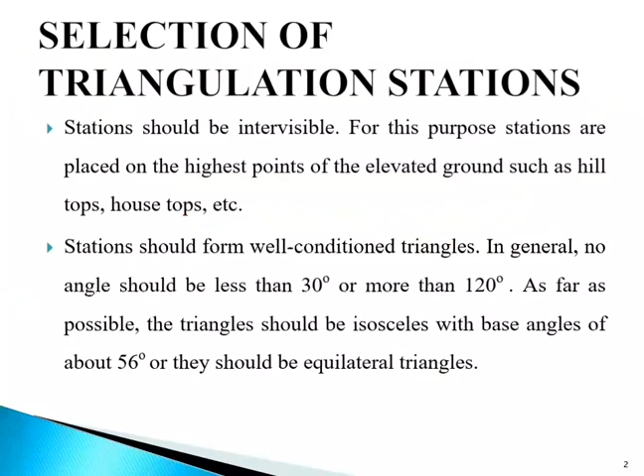Stations should form well-conditioned triangles. In general, no angle should be less than 30 degrees or more than 120 degrees. As far as possible, the triangles should be isosceles with base angles of about 56 degrees, or they should be equilateral triangles. Next, the station should be easily accessible.

Supplies of food and water should be available. There should be a suitable place for camping, or the nearest suitable accommodation should be available. Station should be so selected that the survey lines are not too long. Small sights lead to inaccurate centering, while long ones cause inaccurate bisection of the signal.

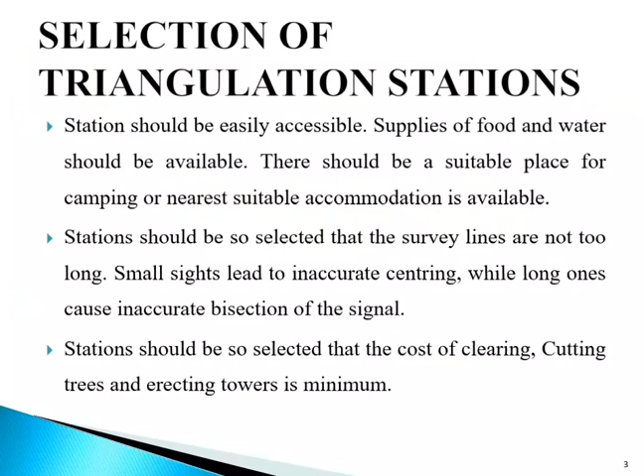Station should be so selected that the cost of clearing, cutting trees and erecting towers is minimum. The station should be in a commanding position so as to serve as control for subsidiary triangulation or detailed surveys inside the network. Station should be selected so that the line of sight does not pass over crowded localities such as cities, towns, factories, etc., to avoid irregular atmospheric refraction.

The line of sight should not graze the ground or other obstruction. It should pass at least 2 to 3 meters above the ground.

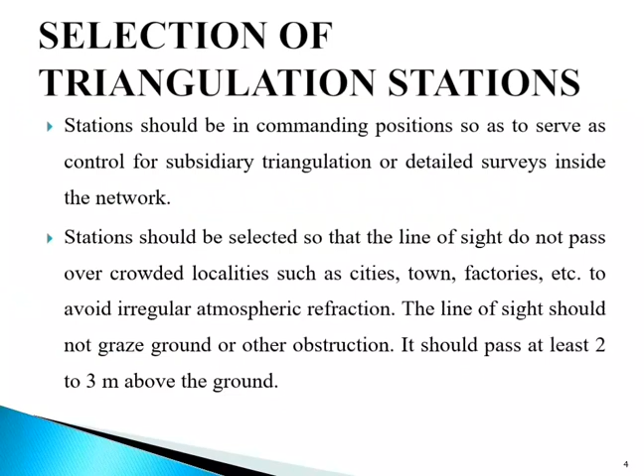Let's see the intervisibility of triangulation stations. The most essential condition of triangulation is that the stations should be intervisible. As stated earlier, the stations should be chosen on high ground so that they are intervisible. For small distances, intervisibility can be ascertained during reconnaissance by direct observation with the help of powerful binoculars, either at ground level or from the tops of trees.

If the distance between the stations is too large, or the difference in elevation between the stations is less, then the stations are not intervisible. To ascertain intervisibility, it is necessary to raise both the instrument as well as the signal, to overcome the curvature of the earth and to clear all the intervening obstructions. The calculations of the heights of a signal as well as that of an instrument are necessary to determine whether it is necessary to elevate the stations to get intervisibility or not.

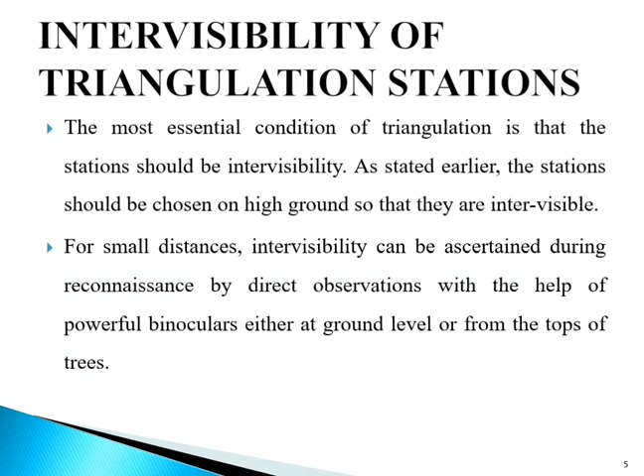Let's see the station marks. The exact positions of the triangulation station should be permanently marked so that the theodolite and signal can be centered accurately over them. The object of a station mark is to provide a surface mark with a permanent mark buried below, and a good target. Depending upon the nature and purpose of triangulation, stations are fixed and permanently marked.

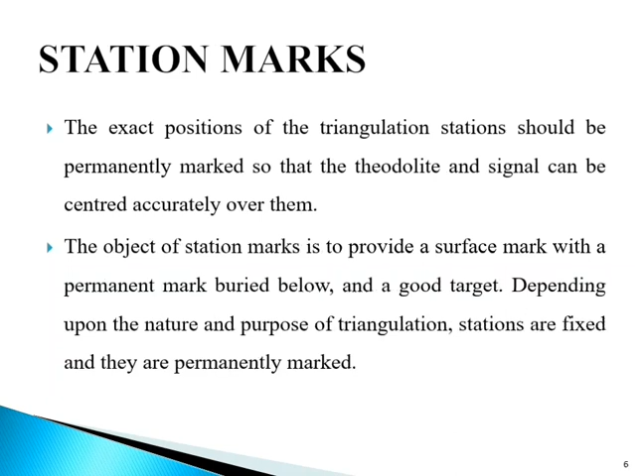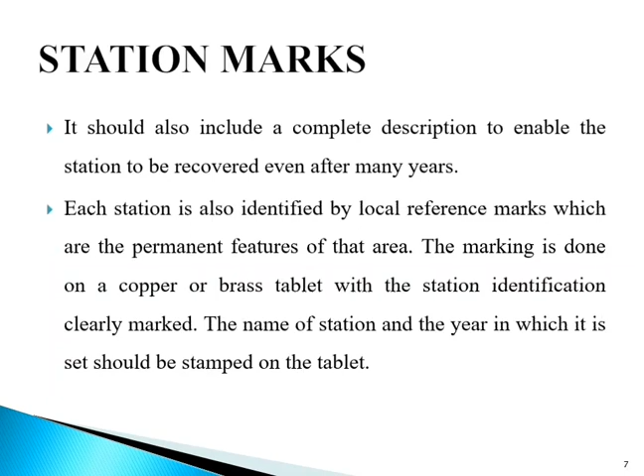It should also include a complete description to enable the station to be recovered even after many years. Each station is also identified by local reference marks, which are permanent features of that area. The marking is done on a copper or brass tablet with the station identification clearly marked. The name of the station and the year in which it is set should be stamped on the tablet.

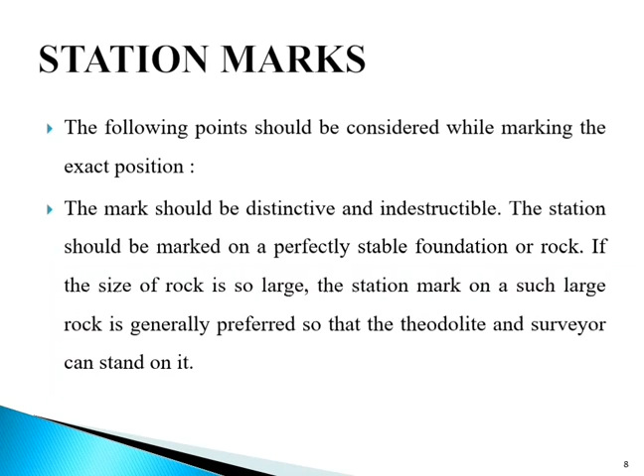The following points should be considered while marking the exact position. First, the marks should be distinctive and indestructible. The station should be marked on a perfectly stable foundation or rock. If the size of the rock is large, the station mark on such a large rock is generally preferred so that the theodolite and surveyor can stand on it.

Generally, a hole 10 to 15 centimeters deep is drilled into the rock, and a copper or iron bolt is fixed in the hole with cement mortar. In some areas, if rock is not available, a large stone is embedded about 1 meter deep into the ground.

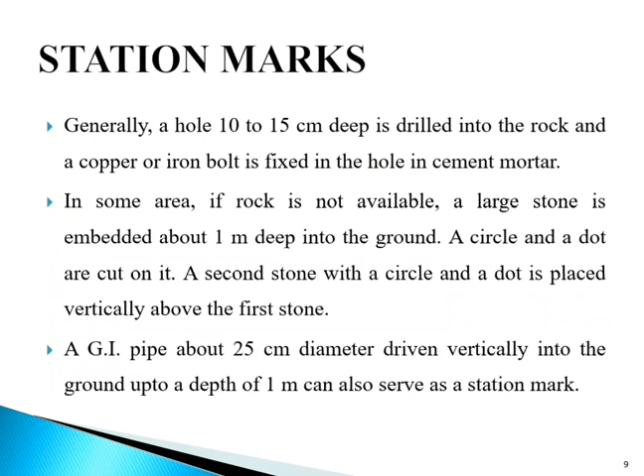A circle and a dot are cut on it. A second stone with a circle and a dot is placed vertically above the first stone. A GI pipe, or galvanized iron pipe, about 25 cm in diameter, driven vertically into the ground up to a depth of 1 meter, can also serve as a station mark.

The mark may also be set on a concrete monument. The station should be marked with a bronze or copper tablet. The name of the station and the date on which it was set should be stamped on the tablet. Here you can see the arrangement of it in the figure.

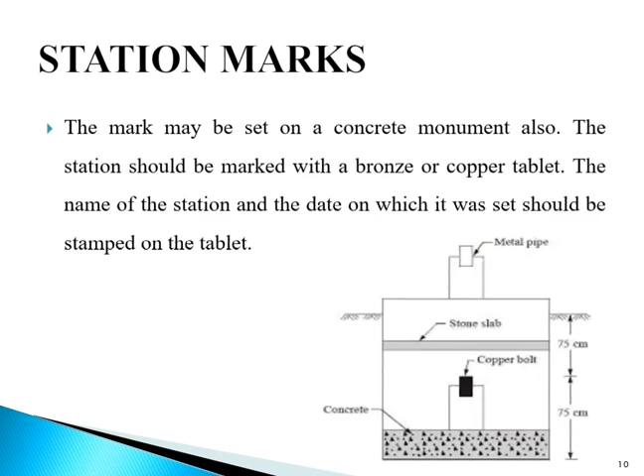So in earth generally two marks are set. One about 75 centimeters below the surface of the ground and the other extending a few centimeters above the surface of the ground. The underground mark may consist of a stone with a copper bolt in the center or a concrete monument with a tablet mark set on it.

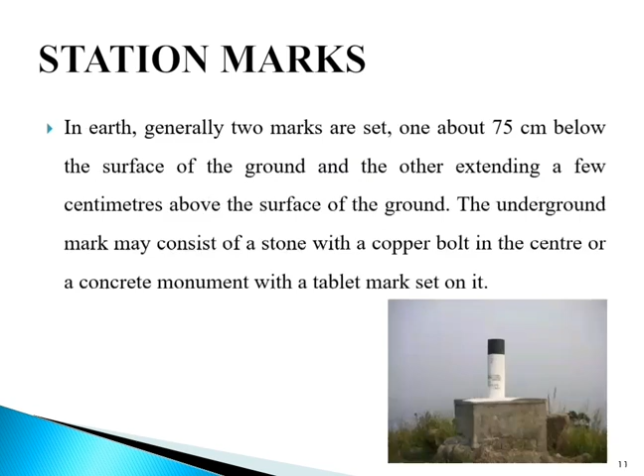So you can see a real life image of it.

The station mark with a vertical pole placed centrally should be covered with a conical heap of stones placed symmetrically. The arrangement of marking a station is known as placing a cairn.

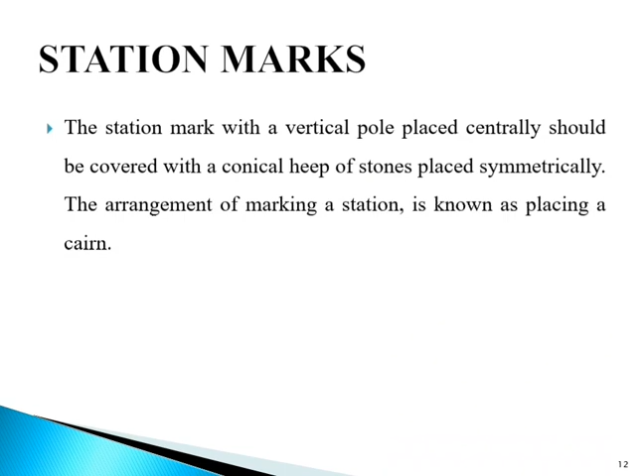2 or 3 reference marks similar in material and shape to the station mark should be provided around the station mark. The distances and bearings of these reference marks from the station mark and from each other should be recorded on them. If the station is disturbed, it is re-established by using these reference marks.

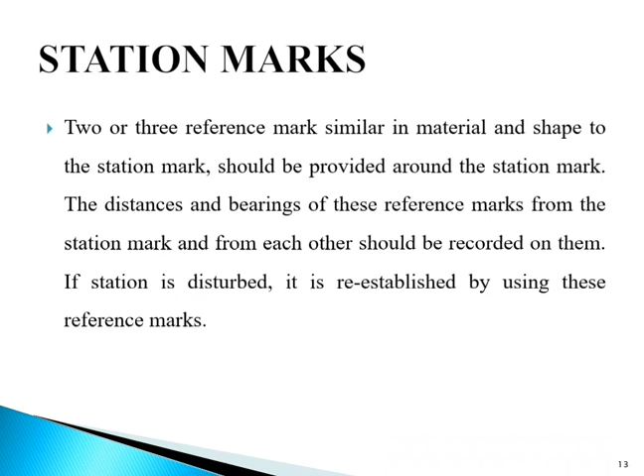Next, surrounding the station mark, a platform of 3 meter by 3 meter by 0.5 meter should be built up of earth. It provides rigid support for the instrument and the signal.

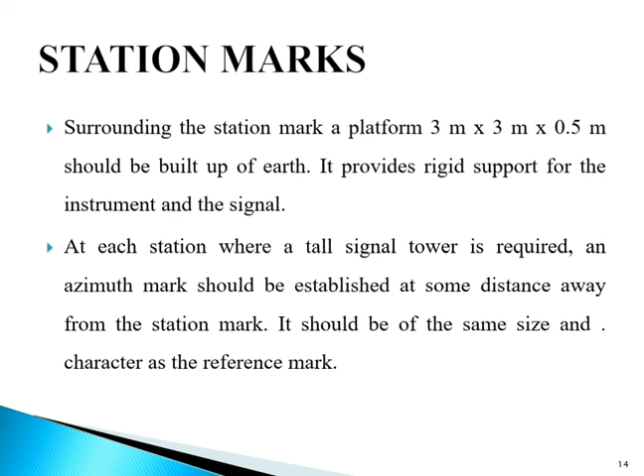At each station where a tall signal tower is required, an azimuth mark should be established at some distance away from the station mark. It should be of the same size and character as the reference mark.

Next is signals. They are devices erected to define the exact position of an observed station. Signals are used to define the exact position of a triangulation station during observation from another station. Signals are centered vertically over the station mark.

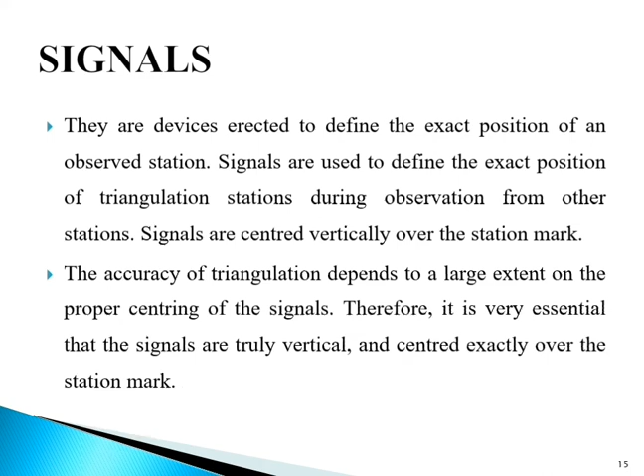The accuracy of triangulation depends to a large extent on the proper centering of the signals. Therefore, it is very essential that the signals are truly vertical and centered exactly over the station mark. So, a signal should satisfy the following requirements.

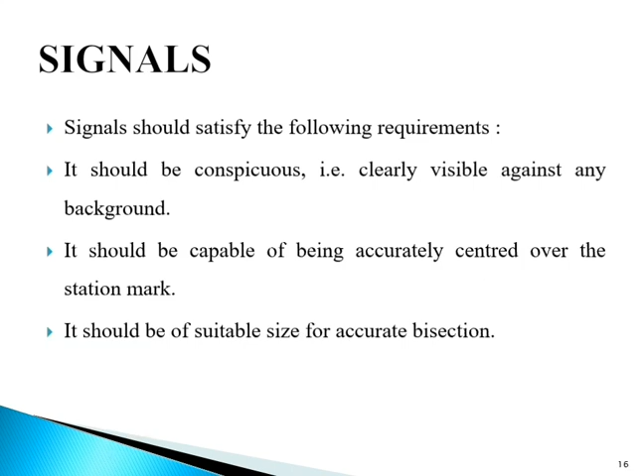It should be conspicuous, for example clearly visible against any background. It should be capable of being accurately centered over the station mark. It should be of suitable size for accurate bisection. It should be free from phase, or it should exhibit little phase. It should be symmetrical and easy to erect in minimum time. It should carry a flag on its top.

Next, signals can be classified into three types. First one is daylight or opaque or say non-luminous signals. Second one is luminous signals and third one is night signals. This theory is very important for your examination, so be sure you remember it with the figure also, because a neat sketch should be drawn when writing this theory.

Okay, so let's see. First one is opaque signal or non-luminous signals. These are used for triangulation with less accuracy and for sights not exceeding 30 km. They are used during daytime observations. They consist of various forms of poles, masts and targets.

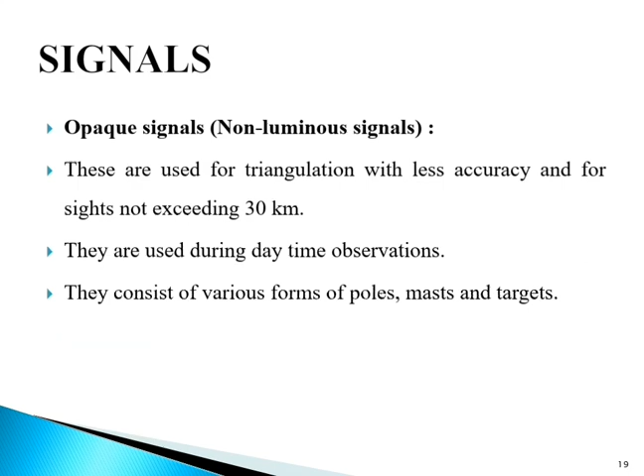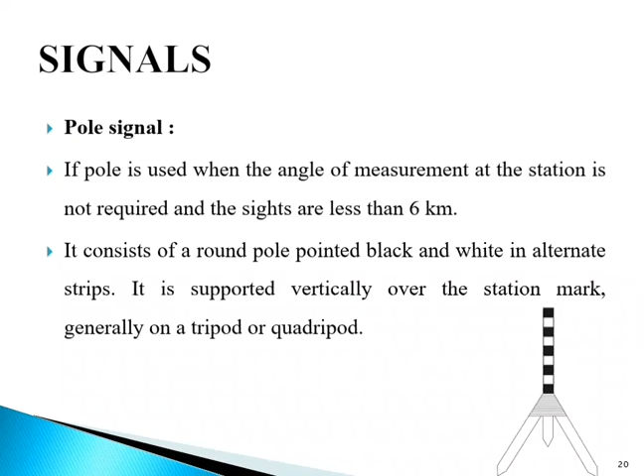Next is pole signal. Pole is used when the angle of measurement at the station is not required and the sights are less than 6 km. It consists of a round pole painted black and white in alternate strips. It is supported vertically over the station mark, generally on a tripod or quadripod. So you can see its image here.

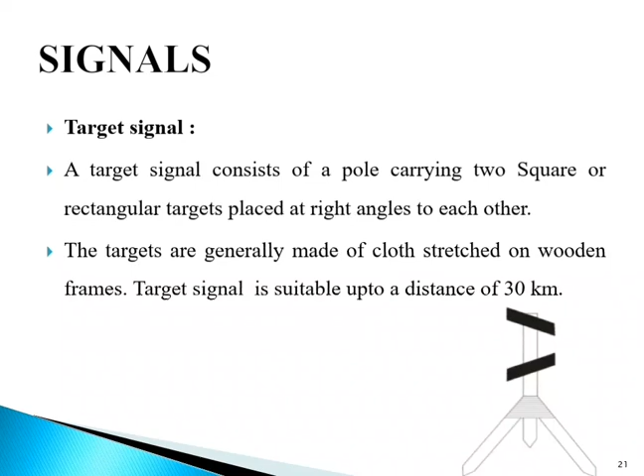Next is target signal. A target signal consists of a pole carrying two square or rectangular targets placed at right angles to each other. The targets are generally made of cloth stretched on wooden frames. Target signal is suitable up to a distance of 30 km. So you can see its image here.

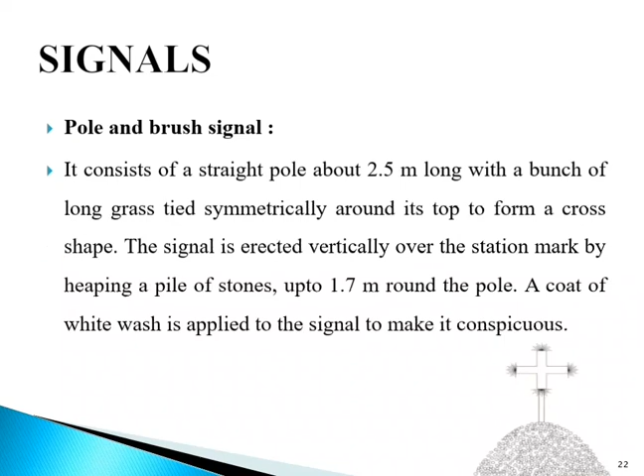Next is pole and brush signal. It consists of a straight pole about 2.5 meter long with a bunch of long grass tied symmetrically around its top to form a cross shape. The signal is erected vertically over the station mark by heaping a pile of stones up to 1.7 meter round the pole. A coat of whitewash is applied to the signal to make it conspicuous. So you can see its image here.

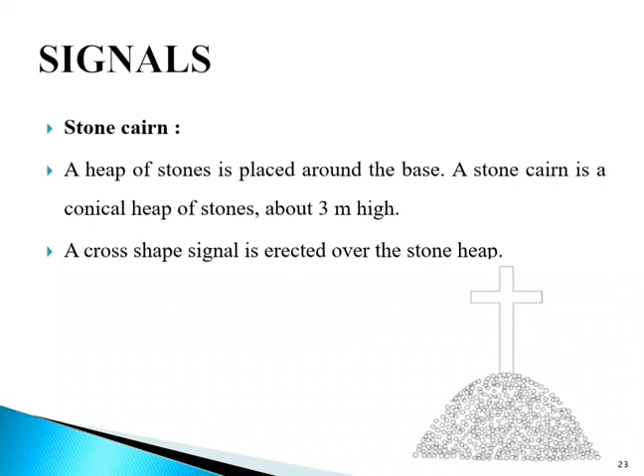Next is stone cairn. A heap of stone is placed around the base. A stone cairn is a conical heap of stones about 3 meter high. A cross-shaped signal is erected over the stone heap. So you can see its image here.

And the last one is beacon. It consists of red and white cloth tied around three straight poles. This can be easily centered over the station mark. It is very useful for making simultaneous observations. So you can see its image here.

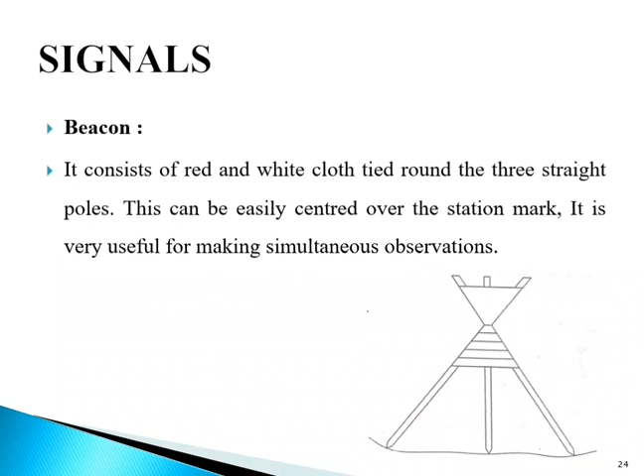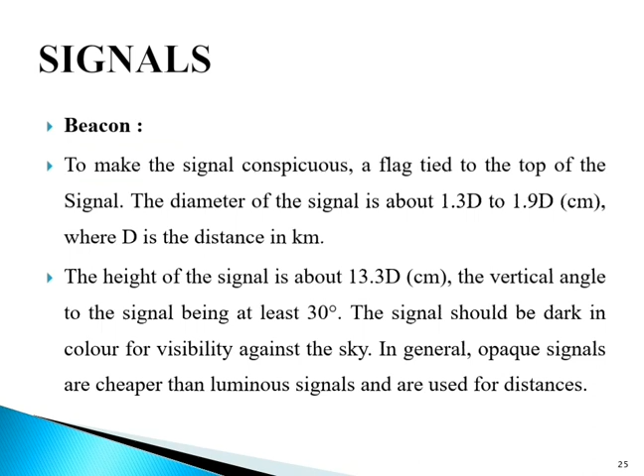So if we talk about it, to make the signal conspicuous, a flag is tied to the top of the signal. The diameter of the signal is about 1.3D to 1.9D in centimeters, where capital D is the distance in kilometers. The height of the signal is about 13.3D in centimeters. The vertical angle to the signal being at least 30 degrees. The signal should be dark in color for visibility against the sky. In general, opaque signals are cheaper than luminous signals and are used for shorter distances.

Next is luminous signals.

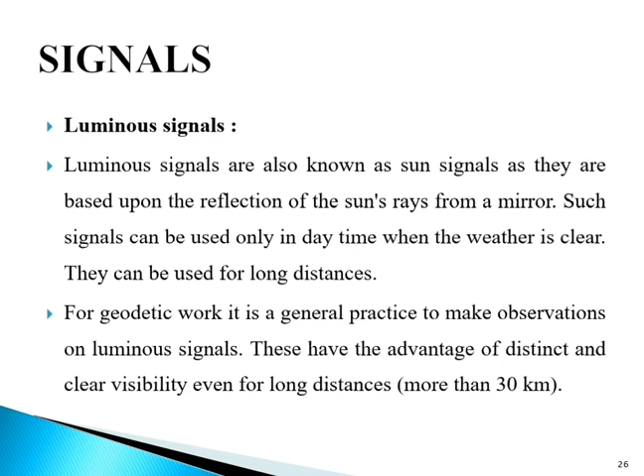Luminous signals are also known as sun signals, as they are based upon the reflection of the sun's rays from a mirror. Such signals can be used only in daytime when the weather is clear, and they can be used for long distances. For geodetic work, it is general practice to make observations on luminous signals. These have the advantage of distinct and clear visibility even for long distances, say more than 30 km.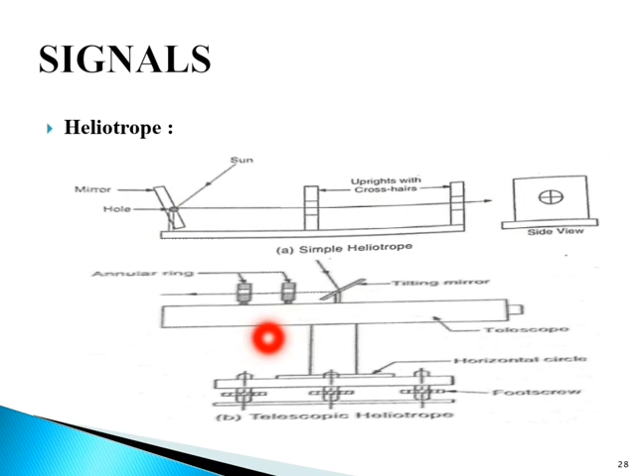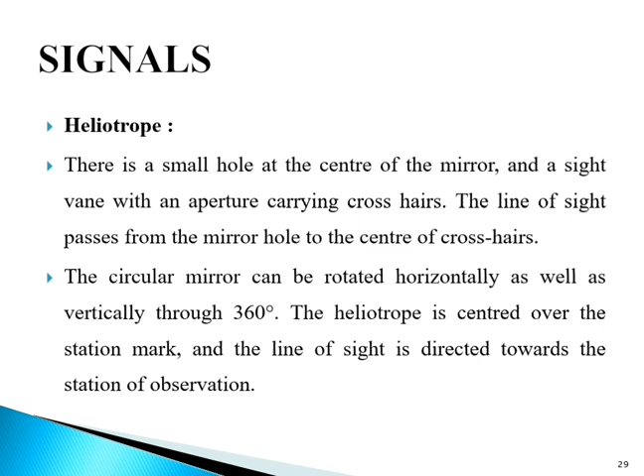There is a small hole at the center of the mirror, and a sight vane with an aperture carrying crosshairs. The line of sight passes from the mirror hole to the center of the crosshair. The circular mirror can be rotated horizontally as well as vertically through 360 degrees. The heliotrope is centered over the station mark and the line of sight is directed towards the station of observation. Flashes are sent from the observing station to establish the line of sight. The mirror should be adjusted every few minutes since the direction of the sun goes on changing.

A form of heliotrope is the Galton sun signal, used for lines of sight exceeding 30 km. A telescope is sometimes used instead of the sight vane to form a telescopic line of sight. The best time for observation with heliotropes is towards sunset. The heliotrope reflects a continuous beam of light, whereas a heliograph reflects periodic beams.

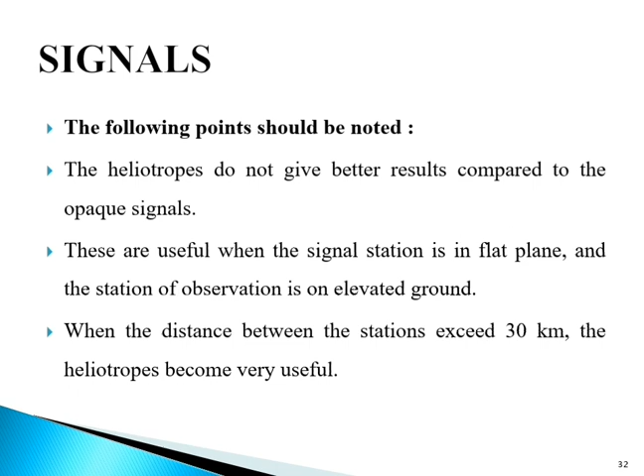The following points should be noted: heliotropes do not give better results compared to opaque signals. These are useful when the signal station is in a flat plain and the station of observation is on elevated ground. When the distance between the stations exceeds 30 km, heliotropes become very useful. These are very cheap and have no running and operating cost, but use of these signals for first order triangulation is restricted since they can be used on sunny days only.

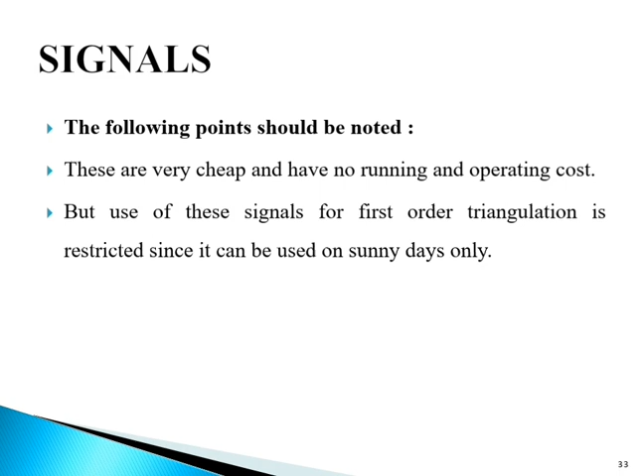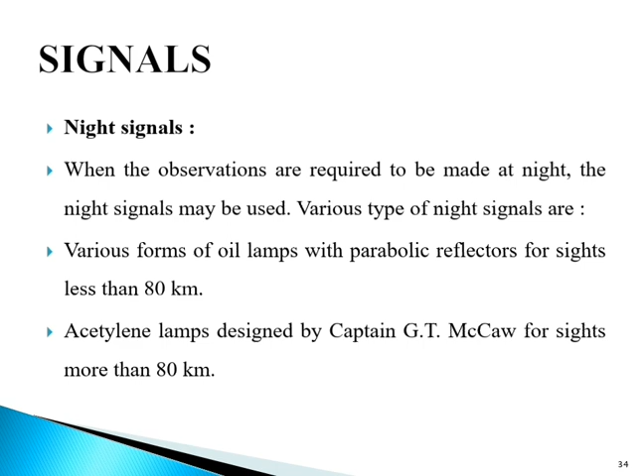Next is night signals. When observations are required to be made at night, night signals may be used. Various types of night signals are there, like various forms of oil lamps with parabolic reflectors for sights less than 80 km, acetylene lamps designed by Captain G.T. McCaw for sights more than 80 km, magnesium lamps with parabolic reflectors used for long sights, and some types of electric lamps are also used.

Next is towers and scaffolds. A tower is erected when it is desired to elevate the instrument or signal above the triangulation station to obtain a line of sight clear of obstructions. A tower is a temporary structure constructed for the purpose of surveying, to elevate instruments and signals. The height of the tower depends upon the character of the terrain and the length of sight.

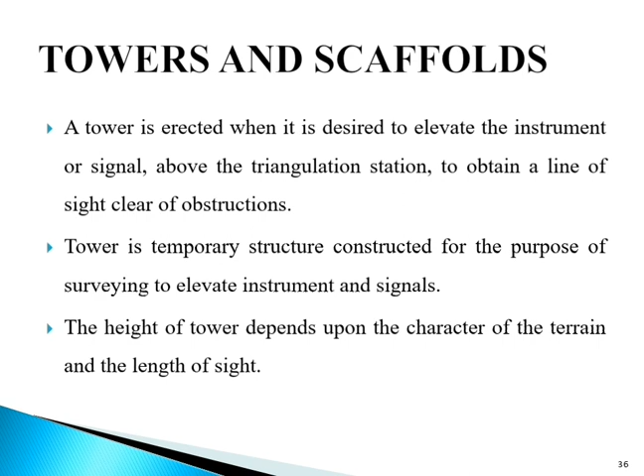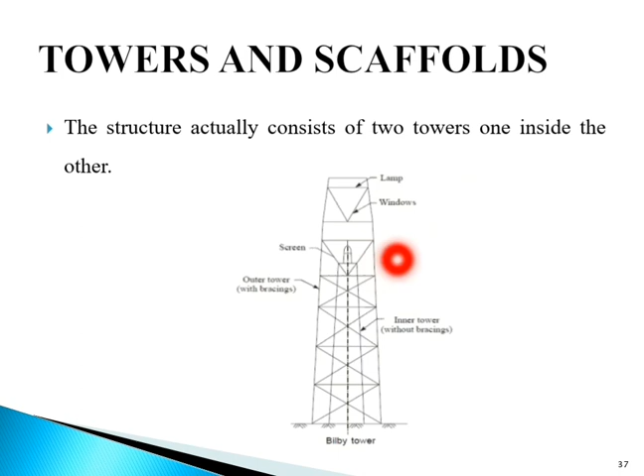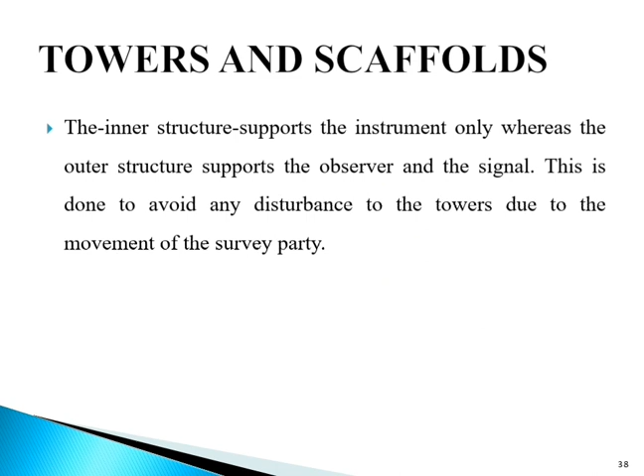The structure actually consists of two towers, one inside and one outside. Here you can see its image - inside tower, outside tower, screen, lamp, windows. It is known as the Bilby tower. The inner structure supports the instrument only, whereas the outer structure supports the observer and the signal. This is done to avoid any disturbances to the tower due to the movement of the survey party.

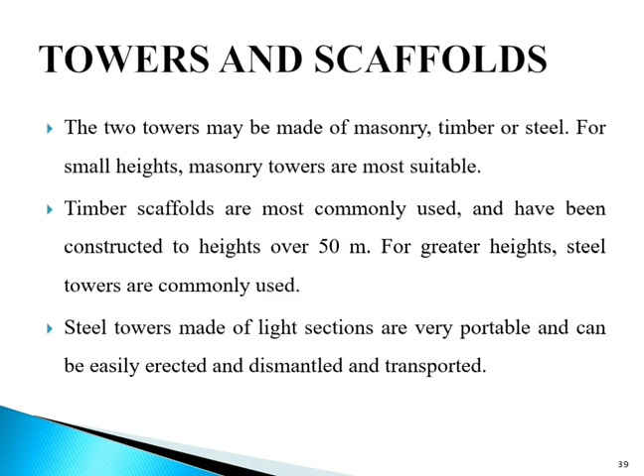The two towers may be made of masonry, timber or steel. For small heights, masonry towers are most suitable. Timber scaffolds are most commonly used and have been constructed to heights over 50 meters. For greater heights, steel towers are commonly used. Steel towers made of light sections are very portable and can be easily erected, dismantled and transported.

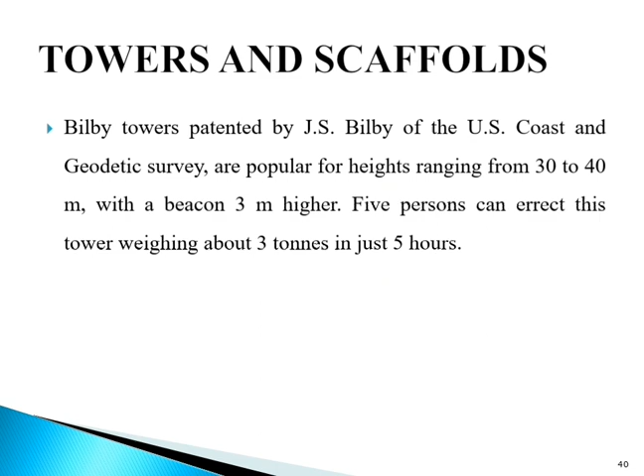Bilby's towers, patented by J.S. Bilby of the U.S. Coast and Geodetic Survey, are popular for heights ranging from 30 to 40 meters, with a beacon 3 meters higher. Five people can erect this tower, weighing about 3 tons, in just 5 hours.

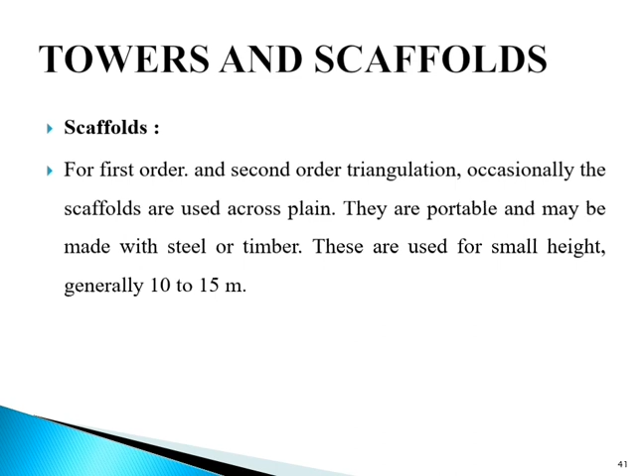Next is scaffolds. For first order and second order triangulation, occasionally scaffolds are used across plains. They are portable and may be made with steel or timber. These are used for small heights, generally 10 to 15 meters. The scaffolds are also made with a double structure similar to towers. The two towers should be entirely independent of each other so that the movement of the observer does not disturb the instrument.